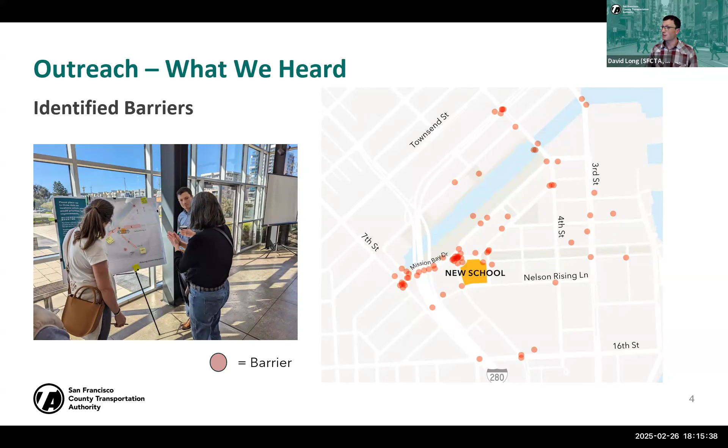This is again a recap from our first round of outreach and reflects some of the core findings. That first phase of the effort combined what we heard in outreach with technical analyses that sought to identify the key barriers on which we would focus our solution development.

So to this point, what I've gone through is a recap of our first round of outreach and findings. We used those to identify key barriers and have a few different alternative concepts to share for each. For the roundabout, we have 3 different alternatives that we developed and evaluated. For the Mission Bay Boulevard north-south couplet between the traffic circle and 4th Street, we have 2 different alternatives. Then we have some recommendations for 7th Street and the I-280 undercrossing. Finally, we have some additional concepts which were beyond the scope of this study to fully recommend, but which we are raising up as ideas that could be considered in future efforts.

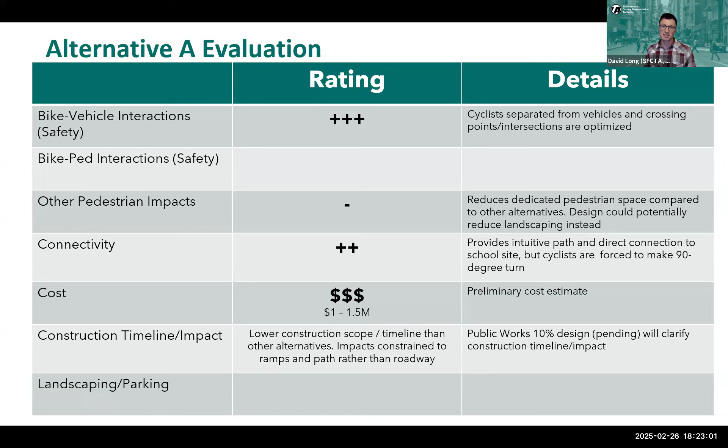This is our evaluation of alternative B. It scores well on our safety metrics, but has a notable pedestrian trade-off. In particular, the bike paths cross the pedestrian path of travel on the sidewalk, which is a significant pedestrian hurdle and a potential challenge to overcome for ADA compliance purposes.

Pedestrians in this alternative are also forced to walk adjacent to the roadway, whereas previously they would walk on the wide arcing sidewalk. The sidewalk in this alternative was routed adjacent to the roadway.

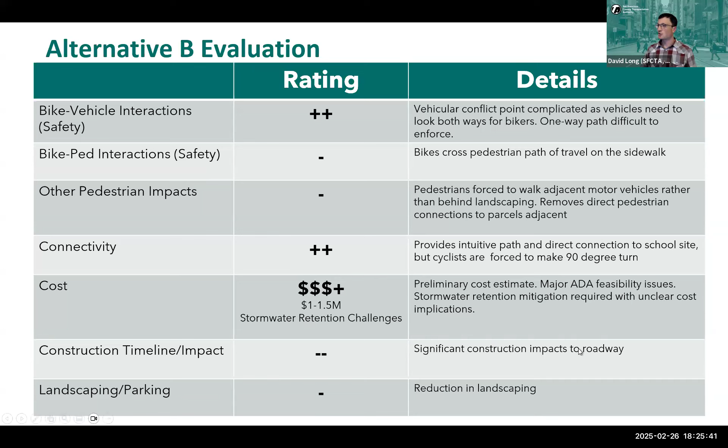If this is a bit much, there is a recap here. Once I walk through all of the alternatives and their evaluations, there is a recap where we'll be able to see each of them side by side, and I'll share our draft recommendation.

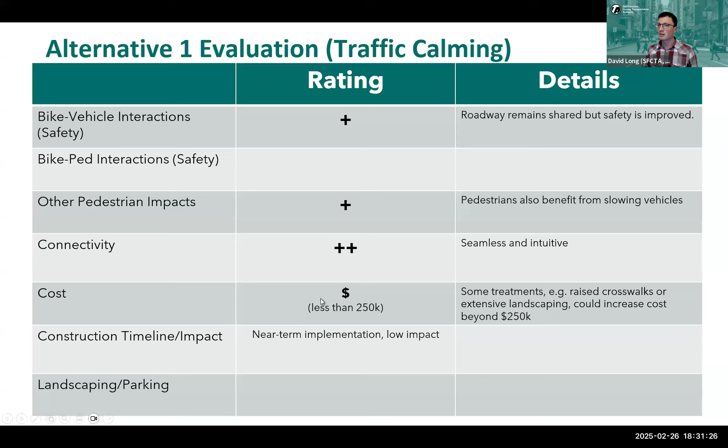Our second alternative for Mission Bay Boulevard is to install a bi-directional bikeway on Mission Bay Boulevard South. This would be a two-way separated facility on Mission Bay Boulevard South.

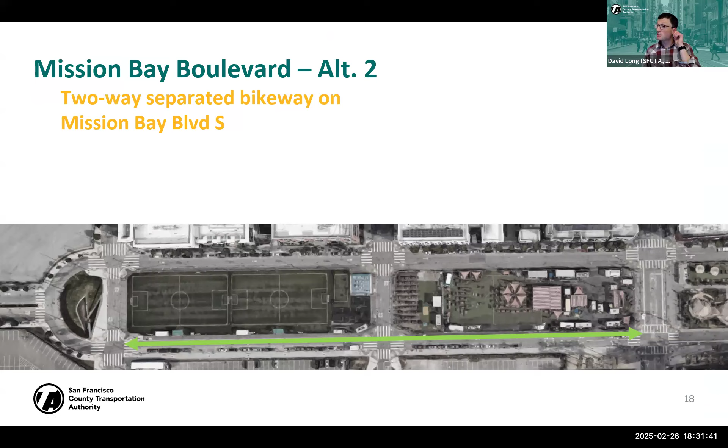Unfortunately, our analysis showed that the roadway geometries on Mission Bay Boulevard South are such that in order to accommodate large truck movements at the intersections, a bike facility like that would not be able to maintain protection at the intersections. So the safety benefit here, we only get one plus sign. It is a safety improvement, but the reality is that it would be protected mid-block, and cyclists would lose that protection as they approach the intersections, which are the most important place to stay separated.

This alternative would also introduce some bike movements which are not as predictable for pedestrians. They're dealing with cyclists moving with cycle traffic from both directions in a somewhat unintuitive way.

Nonetheless, it would be a relatively inexpensive treatment with a near-term implementation opportunity. Also worth noting is that this bidirectional bike facility would necessitate removing parking along the entirety of Mission Bay Boulevard South between 4th Street and the traffic circle. So the facility essentially replaces the parking along that few block stretch.

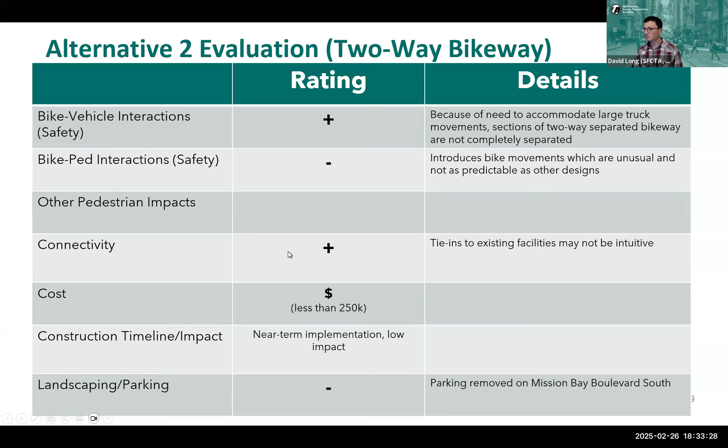As we compare these alternatives, our draft recommendation is alternative one, the traffic calming alternative. It has strong safety benefits, doesn't have any bike and pedestrian trade-offs. In fact, it has pedestrian benefit and could be implemented relatively near term at an approachable cost.

Okay, I'm going to keep moving here and share a couple of recommendations for the 7th Street and Mission Bay Drive intersection. The first of these is to implement a jug handle, which facilitates a left-hand turn for cyclists looking to enter Mission Bay on Mission Bay Drive.

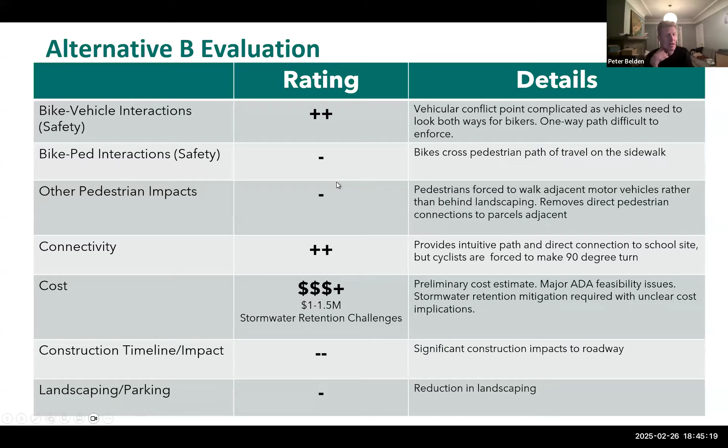And a crucial difference I see between C and A is that A doesn't seem to offer a route home for the child biking to school with their parent in the morning. So I think with option A, you come in, you head counterclockwise, you go to the school, and then as you go back around, there's just not a path there. So I think there are some critical details to go over, but high level, I would say option C is worth pursuing.

And I can imagine, although it's not illustrated here, a quick build version of option C where cyclists are on the roadway with soft hit posts. I think that could be a way to do it if it's not feasible with the budget to implement C as it's designed here, that a quick build version with folks on the roadway could work.

And I guess the last thing I'll say in this first wave is that option A seems reliant on some other projects - the northwest and southwest quadrants are not. My impression is that sidewalk doesn't exist yet and there's nothing in the northwest. So when we envision a circle, you have to go all the way around to go to school and then go home. To me, option A is half missing in the near term. So depending on when those other projects are done, we won't have a real option for a while. More could be said, but I'll leave those. Those are my initial reactions.

Thanks for the comments, Peter. I'll just speak to the last piece and say the astute observation is that the facilities in the top left and bottom left here are part of parcels slated to be future parks and are currently in development. So we're working closely with Mission Bay Development Group and understand there will need to be a phasing and implementation plan brought forward once we land on our recommendations, to make sure things are done in concert - that is part of our scope. So we'll bring an implementation plan forward as part of the final report.

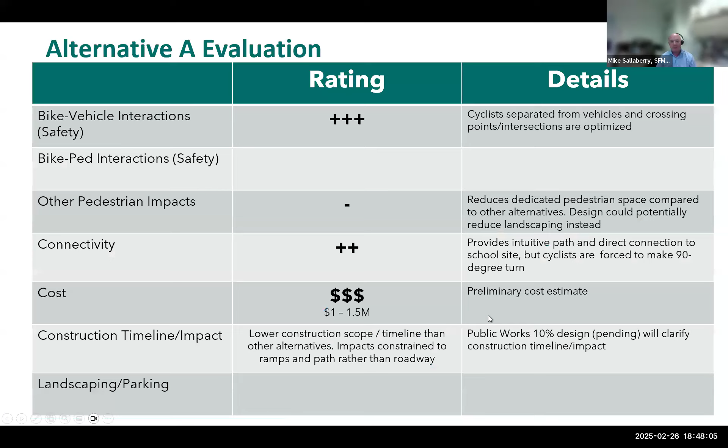I would say a couple things. I understand where you're coming from, Peter, about the desire to have something right when school opens. And I'd add that Alternative C is so impactful in terms of construction - not only does it cost more, it's going to take far longer to design and build, to the point where it may take as long as the park parcels to build out. And I'm not sure there's a quick build version of this that would be considered safe.

And I think the nuance I want to share, something for y'all to think about, is the offset - the distance between the roadway and the bike crossing in this option is pretty small. So if you're a driver in the roundabout turning right, really quickly you're on top of the bikeway. And concurrently, as a cyclist going around the roundabout, if you're not turning right to exit, you can stay left to go around it.

There's a very short distance where, while the driver's turning, all of a sudden you're appearing into the roadway. So I think this is the unfortunate aspect of retrofitting an existing roundabout as opposed to starting from scratch. I know Alternative C looks nice and flowy, but I'm not sure it's a safer option. I would argue that A and B might be safer than C, frankly. So I think this is something worth talking about more, but I just want to throw those thoughts out there as we mull these concepts over.

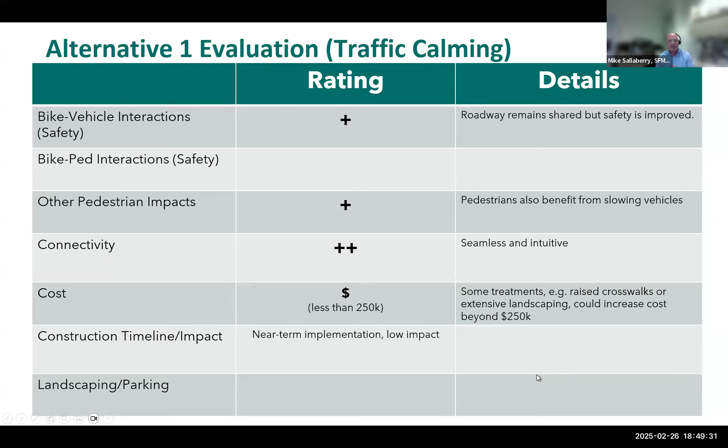And something else, another design detail - we're working with Public Works to try to raise the crossings, and especially where we can get bike and ped crossing adjacent to each other, it looks like a nice opportunity to make that a raised crossing 2-3 inches high that slows traffic right at that critical crossing point. That's due to the topography of the roundabout, where there's existing drainage, it seems to work pretty well at a lower cost way. Otherwise, it might be very, very expensive to retrofit the roundabout. So that's another reason, not only to get more of an offset by having the bike crossing away from the roundabout, you can also consolidate it with the ped crossing adjacent to it and raise it at the same time. So you get that traffic calming element right where motorists are crossing the path of travel for pedestrians and cyclists. That's another thing to consider.

Anyway, I fully expect we should discuss this more offline for those who are really interested in the roundabout designs. Not that we can't talk about it more here too, but...

Thanks for the added detail and context, Mike.

Daniela? Yeah, sure, thank you. And thank you, Peter, also for your question. A number of questions have come through the chat, but I also wanted to give folks the opportunity to raise their hands and ask questions verbally first before we go to the chat. If there are no other questions verbally, we can go to the chat questions. So does anybody have any other questions or raised hands? Okay, Yann, all right, hello there. Yes, hi, it's Yann, great.

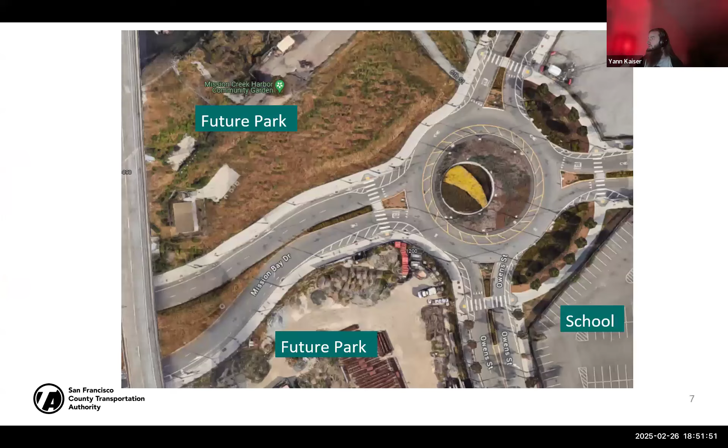So I was looking at alternatives A and B, and it seems like the draft proposal is heading towards A. One of the concerns I have with the 90-degree turns that cyclists would have to do, especially less experienced cyclists as you highlighted, is this is a pretty tricky thing for them to do. You might imagine young teenagers trying to make that turn, or people on those cargo e-bikes that are almost double length, trying to make that turn. The risk I see here is, first, if they have to also cross that curb cut to regain the pavement there, they might catch the curb cut with this longer bike and crash. Or in the even possibly worse version of the scenario, if they're on the roundabout on the cycle track making a 90-degree turn out into one of the side streets, they may overshoot the right turn and end up in the middle of the roadway, creating an unexpected conflict point, which would be very scary.

So I don't know if there's any mitigations that can happen to make this plan safer. I know this is a draft at this stage, but I'd love to see something like maybe raising the crosswalks, something like this to eliminate the curb cut from the things to navigate at that stage, but also giving more space or more barriers to make sure that this wider turning angle can be made safely.

Yeah, exactly, you bring up a great point, and it doesn't show up here, but it's something we talked to Public Works about - we don't want 90-degree turns because one, they're just super awkward to make, and two, what if you have a larger bike? You might have a long cargo bike or one of those 3-wheeled cargo bikes, and having to turn 90 degrees in a very small space is just not realistic. So what we've talked to them about is actually flaring out the bikeway, adding a radius to it so that you could make the turn more smoothly, to exit the bikeway and to enter the bikeway in both directions, entering and exiting the roundabout. So it wouldn't be a 90-degree turn in a very small space.

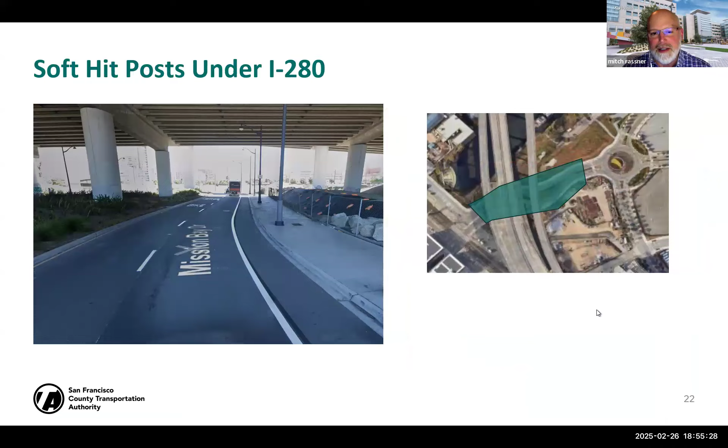Something that's not part of this plan, but I'm trying to figure out a way to reduce traffic in the circle itself. A lot of cars going down Mission Bay Boulevard East are really heading towards Berry Street. They go around the circle, flip around, wait at the traffic light, and make the right turn where we've proposed the third lane for right turns. Is there a possibility of creating a U-turn space under the freeway, using the existing left lane? I know it's overcapacity right now, with 2 lanes going east on Mission Bay Boulevard East and a proposed road diet. But what if that left lane was used as a space for cars to line up and make a U-turn to get to Mission Bay Boulevard West without going around the roundabout, to decrease traffic in the roundabout?

I don't think that's something I've considered before, and it's definitely not within the scope of this project, but it's an interesting idea that I can take back and share around. There's a lot of conflicts here, especially a lot of pylons holding up the freeway, and managing something like that would pose a lot of technical challenges, but it's an interesting idea. Thank you for raising it.

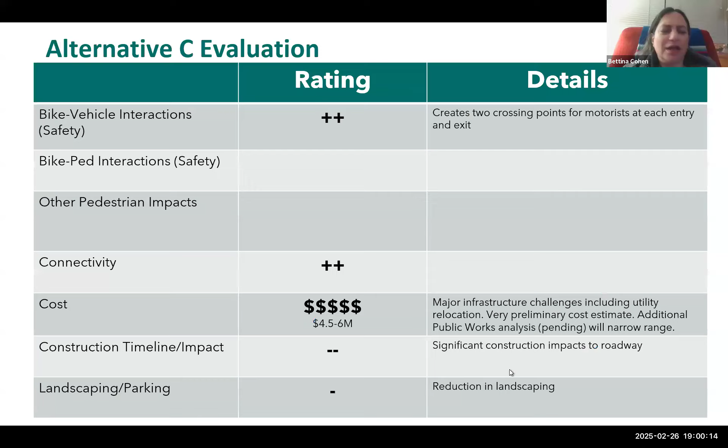Thank you for this wonderful town hall and the presentation. It's a lot of information, and I know David mentioned how you guys were going to collect our feedback, but I didn't quite get it. I'm wondering, is there going to be another online survey like you distributed last year? Can you make that clear to me, how you're going to collect feedback after we've had a chance to digest all of this.

We're not planning to distribute another survey like we did in our first round of outreach. What we're doing is offering presentations to any community-based organizations that would like it. We'll have open format discussions and collect feedback like this. I know you also have Daniela's email, so you're welcome to provide feedback that way. I know you've already provided helpful feedback at a few different junctures through that avenue. And the presentations are available on our website now for anyone to download and mull over.

We'll also be presenting at the Mission Bay CAC coming up in March. So that's another venue open to everyone, and we would welcome and encourage folks to come and share thoughts with us. And if anybody has a community-based organization that would like this presentation and space to talk through and give feedback, please feel free to reach out to Daniela and we can set that up.

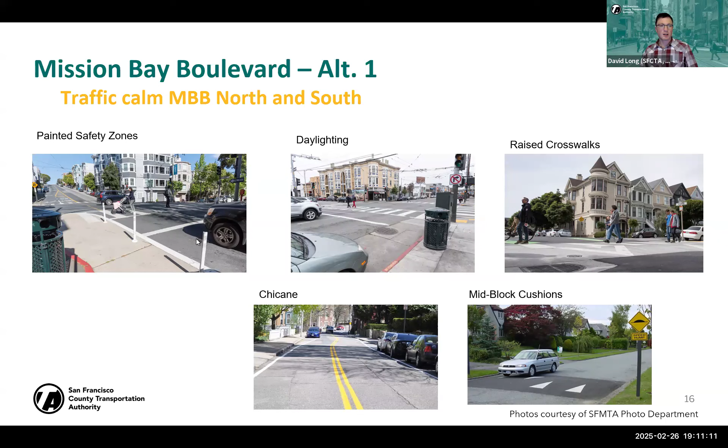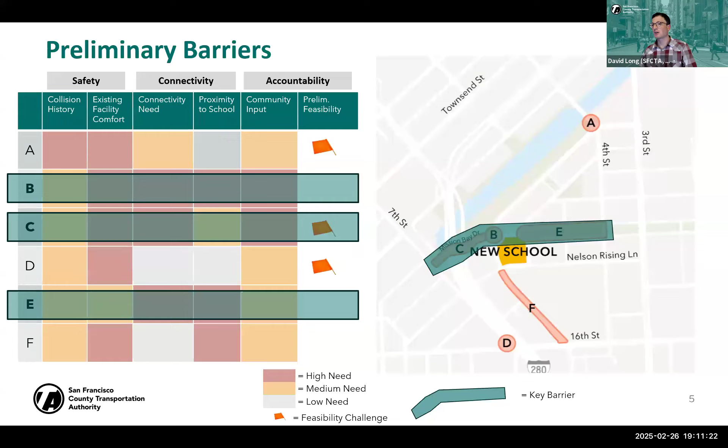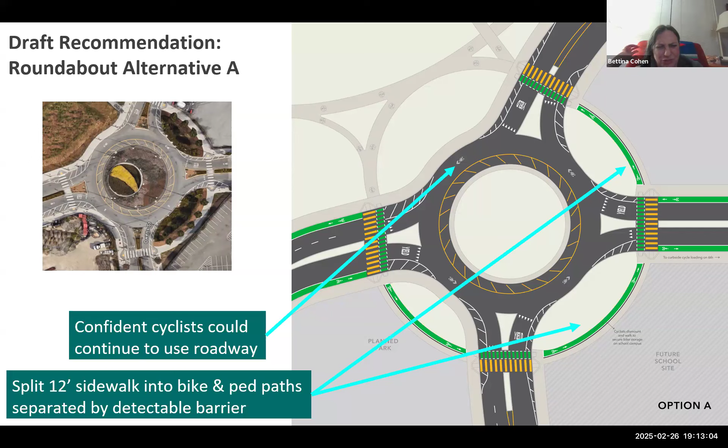Looking at this, you have alternative A. Was that the one? Because with that one, I was clear that pedestrians are giving up half of the sidewalk to bicyclists. But was that not in reference to alternative C?

Good question, I guess I didn't clarify. That park, with the multi-use path in the northwest corner, is consistent across all of our recommendations. The park has already been designed, and the Mission Bay Development Group is hoping to deliver it soon, as quickly as they're able to acquire permits and start construction. So that design is consistent across all of our alternatives.

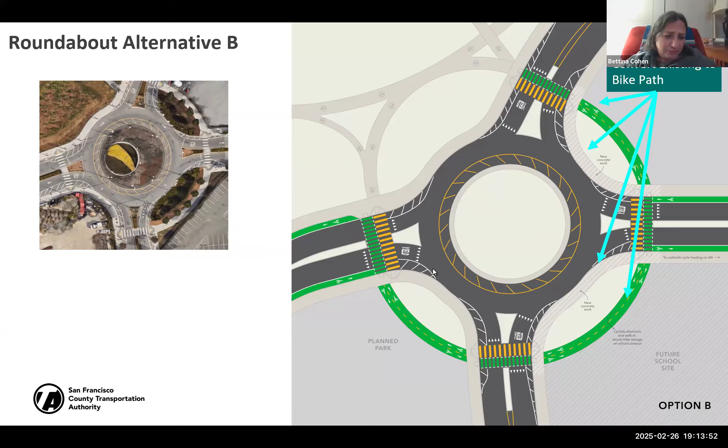Natalie Larson in the chat asks what the impact of these alternatives will be to traffic flow.

None of these alternatives are anticipated to have major impacts on motor vehicle flows, with the exception of impacts during the construction period. That was one of our metrics for evaluation, the timeline and construction impact. Alternatives B and C would have a significantly more challenging construction impact, because there are actual adjustments to the roadway, whereas alternative A's impacts are limited to the ramps where the pedestrian and bike facilities approach the roadway.

Hey Dave, I went back and looked at where I asked that question, and it had to do with down at Mission Bay Drive, where people want that dedicated right turn lane, which I understand why drivers want. And you need to move the bicycle path over into the park area, right? That's the idea, if we can ever get that park finished.

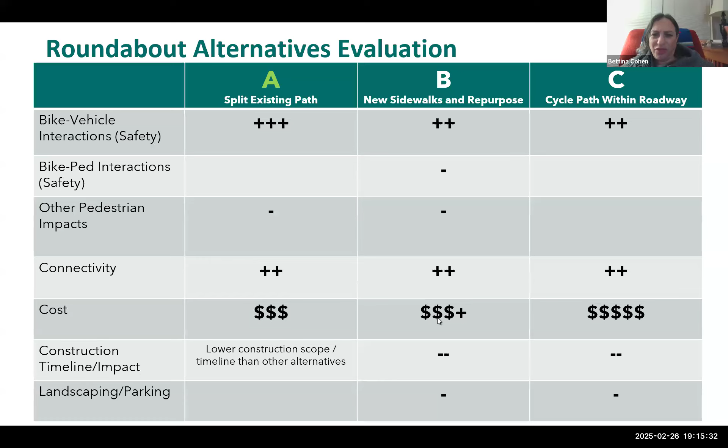Is that going to affect any of the sidewalk there for pedestrians? Because I walk along there a lot. Yeah, great question and astute observation, the answer is it very likely would. It would take sidewalk away?

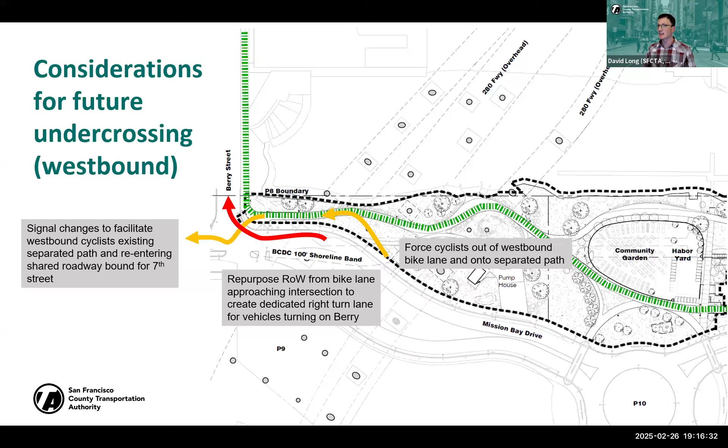Let me rephrase, we need to be thoughtful about the bike and pedestrian interactions were this concept to be pursued. This is included within our batch of mid-range vision ideas, Bettina, so it's not something the study includes in our core recommendations. We're capturing it as an idea that could potentially advance study goals, but questions about the bike and pedestrian trade-offs and more detailed design would need to be figured out in a separate study. So, astute observation - we need to be thoughtful about how those things interact, and we don't plan on doing that in this phase of work.

There's not a lot of land right there because the water is there as well, and I don't know if you can build an extension or something, but the fact is a lot of people walk along that sidewalk now. There'll be more when there's a school there, and also the building that's going to be built with maybe 500 units in it. So I ask you not to keep taking away the sidewalk space from pedestrians, because we're going to need the sidewalks.

Thank you for the comment. All right, this is Natalie Larson. Thank you for answering my question.

Thank you for this presentation, this was super helpful. I think my concern is just what's the impact in terms of traffic flow, and I think you answered that, which was helpful in terms of all the alternatives you presented. You've got a lot of kids and parents at the school, and some will walk, some will bike, but a lot of them are going to drive. So you don't want to get clogged situations coming in and out of school.

Thanks for the comment. Could I make a follow-up question or comment on what Bettina just said? I only have a small screen to work with, so I'll say yes, and then I'll ask Daniela to figure out who speaks next. Oh, I can wait, I'm sorry, I don't mean to go out of order. I can't see either who's in line. I'm not sure there is a line. So Dan, why don't you jump in and ask your follow-up question, and then Daniela, if you could call on the next person.

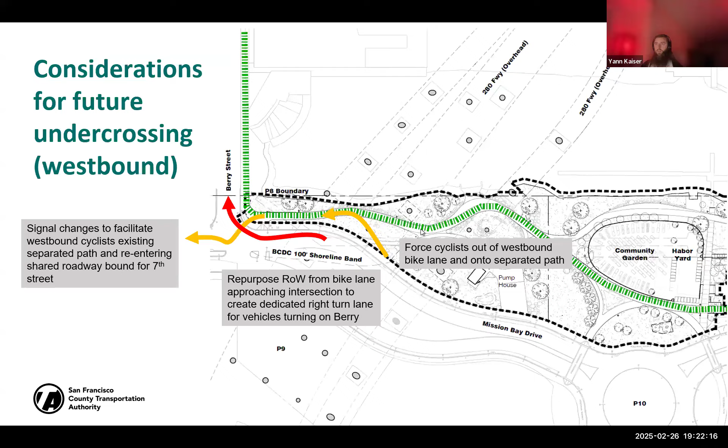Hi, yes, on the jug handle, since we haven't brought it up much—I brought it up earlier in the written comments in the chat. One of my main concerns there, as someone who's tried to use this intersection as a bicyclist and as a pedestrian: my first time there, I tried to use the pedestrian crossing and pushed the button to wait for the pedestrian signal to cross the street. It's unfathomably long to wait there, even after pushing the button. It would be nice to see that improved so pedestrians are given some priority in the queue of different signal phases.

Especially if we're going to expect more modes to be using this. In addition, it's always a bit unclear what you're supposed to do as a bicyclist in this intersection, even if you're continuing forward, so it'd be nice to see some improvement there. But the main thing that isn't really visible in those overhead pictures is that the time to cross the street is so extremely long that something needs to be modified. A project should be drafted.

Thanks for the input, Yann. I'll add briefly that the signal timing at this intersection is deeply complicated, a lot of it complicated by Caltrain, and Caltrain is planning to run more trains through here. So, heard. It's tough.